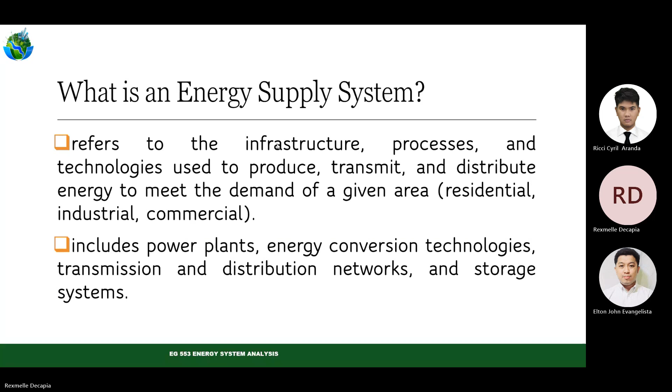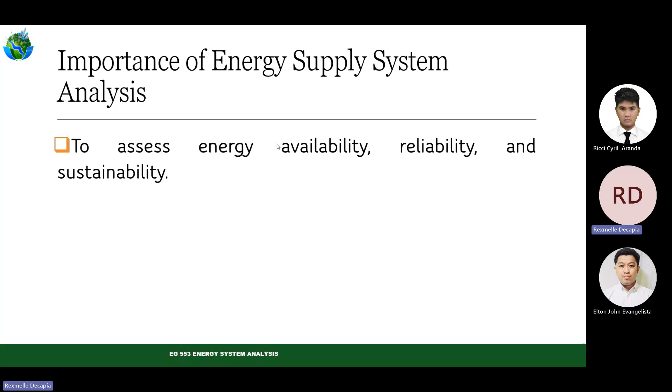So what is the importance of energy supply system analysis? First, we have to assess energy availability, reliability, and sustainability. Availability means adequacy of the supply. Reliability means its ability to be available at a given period of time. And sustainability means continuous supply of electricity or power, kasi alam naman natin it has a tremendous impact on our economy, or in our lives.

Kahit sa bahay nga natin, kapag nawawalan tayo ng kuryente or nawawalan tayo ng fuel sa pagluluto, talagang yun ay nagiging inconvenient sa atin. This problem, nung mga unang panahon, nung I think nung mga early 90s, yan, commonly yun yung nagiging problema natin itong tatlong ito, yung availability, reliability, and sustainability. And therefore, the government really tried to implement programs and strategies that would ensure na magiging available, magiging reliable and sustainable yung ating energy.

To identify the most cost-effective, environmentally friendly, and technologically feasible solutions. So when we talk about technologies, facilities, and resources, especially energy resources, tinitignan din natin yung cost effectiveness. We have to balance yung cost effectiveness, yung environmental impact, and yung technological feasibility, because iba-ibang forms or sources of energy ay syempre magkakaiba sila ng cost. Alam naman natin when we talk about conventional energy resources, itong mga non-renewable energy resources, normally sila yung cost effective, kasi medyo mura dahil sa availability nila.

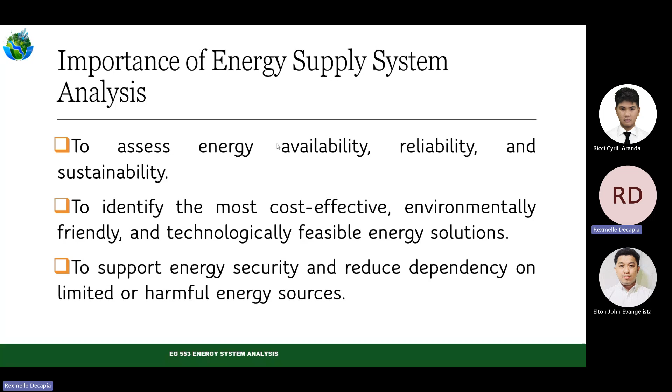Take note that the cost of energy in the Philippines is highly volatile, basically because our self-sufficiency is very low. Not even 50% of our primary energy is actually indigenous - more than half of this energy supply, especially the primary forms, is still imported from other countries, and that makes our cost of energy, specifically electricity, very volatile. So at least if we can further develop other technologies, if we can identify potential other sources of energy, there is a possibility that our self-sufficiency will also improve.

So what are the key components of energy supply systems? What are the components? First, let's look at energy sources. When we talk about energy sources, we're talking about non-renewable sources like fossil fuels - coal, oil, natural gas, nuclear energy. Those are just a few examples of non-renewable energy, but actually there are still a lot more examples.

And when we talk about renewable energy sources, there are also many - such as solar, wind, hydroelectric, geothermal, biomass. Sometimes we call it 'BIGSHOWE' - Biomass, Geothermal, Solar, Hydro, Ocean, and Waste energy.

Aside from non-renewable and renewable sources, we also adopt the combination of the use of these renewable and non-renewable energy sources - we call it hybrid systems. It combines renewable sources with conventional energy systems, like for example a geothermal plant combined with a diesel plant, or hydro and diesel. There are some power generating plants with that setup. We call it hybrid because hydro is renewable and diesel plant is non-renewable.

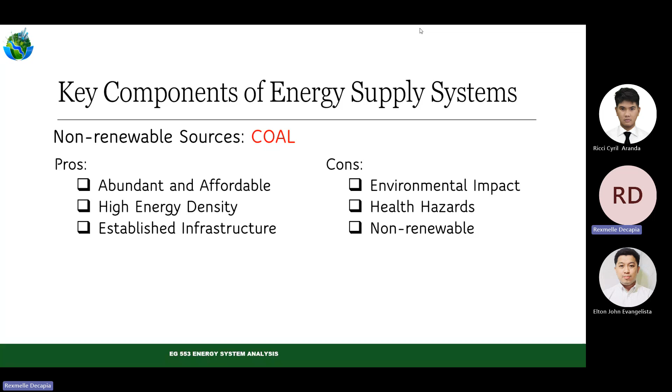And then another type of fuel na ginagamit natin, yung oil. Alam naman natin, lalong-lalo na sa mga sasakyan, yung mga ginagamit natin, mga bunker oils, diesel oils, gasoline oils, and so on, mga we call it mga petroleum products. So bakit natin sila ginagamit?

Katulad din ng coal, mataas yung kanyang energy output. Aside from that, yung oil is more versatile than yung coal. At what do you mean by more versatile? Mas marami siyang nagiging application.

For example, nagagamit siya sa transportation, kagaya ng mga gasoline and diesel engines. Nagagamit siya to produce heat, as fuel. At nagagamit din siya sa mga chemical industries, to make other usable products like plastics, fertilizers, and other synthetic materials.

So this is highly versatile in comparison with the coal. Kaya talagang pag sinabi mong oil, kaya tinatawag natin silang petroleum products kasi yung range ng products ay talagang madami. At similar to the coal naman, talagang well-established na yung mga infrastructure for extraction, for refining, for distribution and transportation. So talagang it has been there for several years, kaya talagang it's already established.

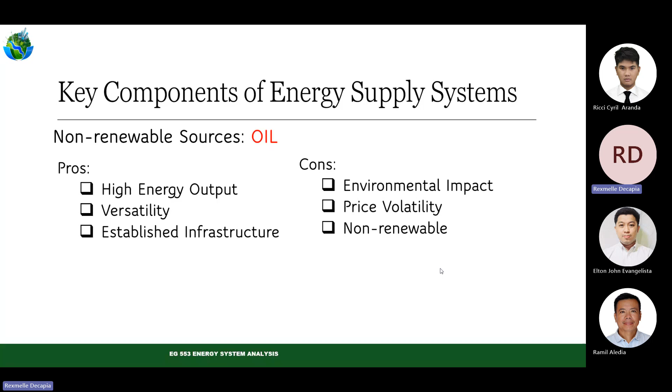non-renewable energy source ay yung tinatawag nating natural gas. Sa Pilipinas meron tayong mga natural gas, kung naririnig nyo sa may Malampaya. Pero sabi nga nila yung ating reserve for natural gas ay medyo konti na lang, I think mga by 2030 or by 2040 ay talagang depleted na yung indigenous supply natin ng natural gas. Kaya we are trying to locate another potential source of natural gas, because some studies says that there are still other potential areas in the Philippines with high natural gas reserves, but that is something that still has to be proven.

May mga studies na ginagawa yung mga resource assessment experts on quantifying the amount of natural gas reserves in a particular area. So sa mga isla malapit din o sa mga areas malapit din sa Palawan, sabi nila marami pang mga natural gas reserves that are not yet explored.

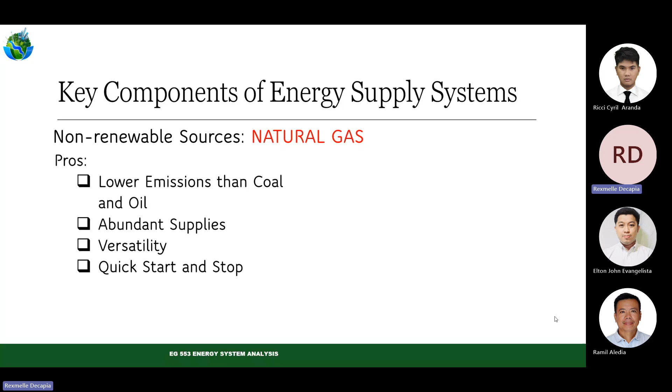Madali mo siyang i-on, madali mo siyang i-off. Parang yung stove sa bahay natin, di ba? Madali lang naman siyang i-on, saka madali siyang i-off. Because hindi katulad ng coal, pag pinatay mo, meron pang baga. Pero sa case ng natural gas, talagang pag pinatay mo, automatically mamamatay siya.

However, meron din naman siyang mga disadvantages. Siyempre, katulad din ng coal and oil, meron din siyang significant emissions, emissions of greenhouse gases, lalong-lalo na yung methane.

Yung methane kasi, it becomes yung nagiging greenhouse gas that cause yung global warming. Then, yung environmental impact ng extraction, siyempre gumagawa kasi tayo ng mga hydraulic fracturing. Pag sinabi nating hydraulic fracturing, yung ground or yung rock structure ng earth ay binubutasan natin, just to extract, to allow the gas to escape from this crack.

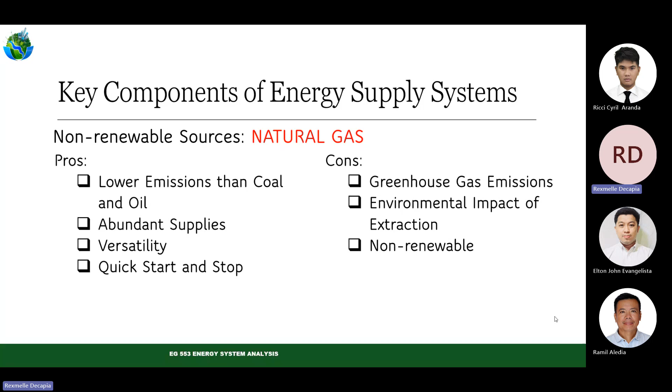So yun yung sinisira niya, sinisira niya yung natural na landscape. Yung pagsira natin diyan, yung mga hydraulic fracturing na yan, doon din kasi dumadaan yung groundwater natin, so there is a possibility na yung groundwater natin will be contaminated with natural gas. Sometimes nagiging cause din siya ng mga seismic activities katulad ng geothermal power plant, at talagang once na-damage na yung water body, sisirain niya rin talaga yung environment. And this is also a non-renewable form of energy.

Okay, another is a very controversial form of energy, especially sa Pilipinas. Napaka-highly controversial nito. Up until now, marami pa ring haka-haka, marami pa ring mga plano, marami mga proposals, na magtayo or patakbuhin or paganahin yung Bataan Nuclear Power Plant. Na up until now, wala pa rin namang nangyayari. Actually, we have an initial discussion with the PNRI.

We are planning to, hopefully, magmaterialize na magkaroon kami ng collaborations to conduct trainings, at magkaroon tayo, makapag-develop pa tayo ng maraming mga nuclear physicists, at mga radiologists, technical manpower pagdating sa nuclear energy. Kasi there are plans na mag-establish ng nuclear power plant sa Pilipinas.

So, yun yung plano, together with Japan Atomic Energy Agency and International Atomic Energy Agency. So, we are trying to collaborate, hopefully mag-materialize na makapag-train o makapag-develop ng mga experts sa Pilipinas pagdating sa nuclear energy, so that kapag talagang nag-decide na yung gobyerno na i-pursue yung establishment of nuclear power plant, at least meron na tayong mga ready na manpower, technically knowledgeable and capable, probably hindi para mag-design, probably just to operate and monitor and run the facility.

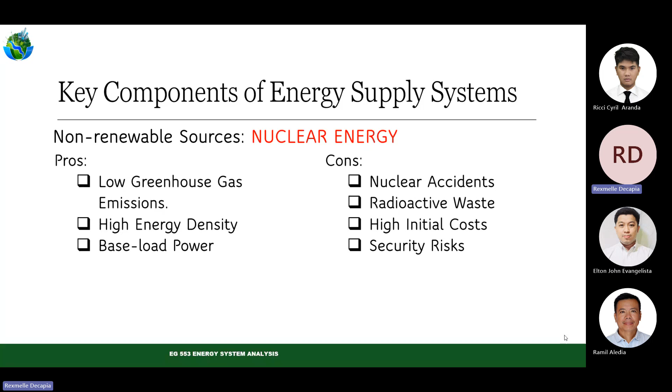Okay, so we're done with mga non-renewable energy sources. Pero medyo marami pa po yan. Diniscuss ko lang yung pinaka-common at pinaka-gamit na form of non-renewable energy. Same with that, we are going also to discuss yung mga pinaka-common, kasi marami pang renewable energy sources.

Mga thermionic, magnetohydrodynamic, but I will not dwell on that kasi yung mga bagong technology na ginagamit, mga piezoelectric, ganun, we will not dwell on that kasi hindi pa siya well established. We will just be discussing yung mga renewable energy that are already established.

Although sinasabi ko lang na established kasi gamit na, but in terms of efficiency, in terms of studies, there are still a lot of studies being conducted, particularly to improve the type of materials na ginagamit. Kasi when we talk about solar energy, dalawang paraan ng pag-utilize ng solar energy. Pwede tayong gumamit ng photovoltaic cell.

Yun yung common na nakikita natin, mga photovoltaics. Or pwede natin siyang gamitin solar thermal. Ito yung mga alam naman na siguro natin, yung mga parabolic dish na ginagamit, for yung iba gumagamit ng tawag natin nun, I forgot the right term. But there are a lot of technologies na ginagamit, just yung mga solar, pero normally mga solar concentrators ang ginagamit talaga kapag solar thermal.

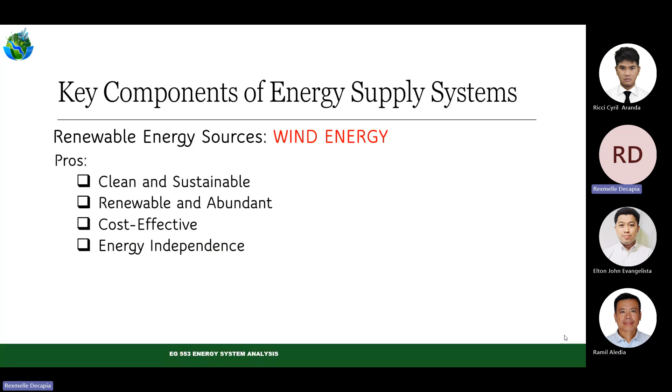Parang off-grid yung lugar, wala pang supply ng electricity doon sa site na napili niya. So yun naman yung advantage ng ganitong technology.

Disadvantages or consequences are intermittency and variability, alam naman natin yan kasi dependent tayo sa wind. Impact on wildlife, kasi pag malalaking wind turbine, sabi nila nakakaapekto sa mga ibon, na nag-create din sila ng flickering effect na nakakaapekto din sa mga ibon, at yung tumatama sila doon sa mga blade.

Syempre, yung lugar, kung napapansin nyo, sa may Burgos, dati yun ay kagubatan, yun ay forest, but when yung wind farm was established doon, medyo nakalbo yung bundok. So, impact on wildlife, noise and aesthetic issues, space and location requirements.

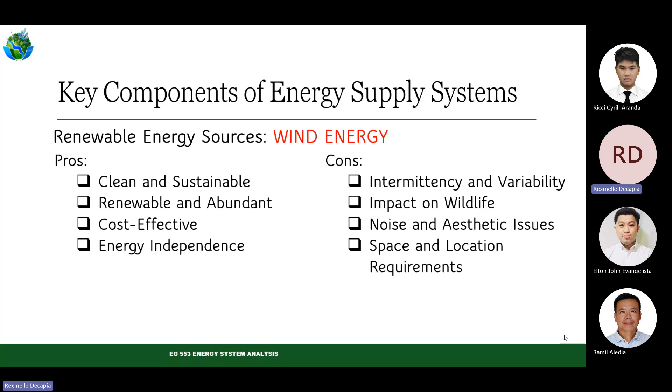Hydropower plant. Siyempre alam naman natin yan, ito yung mga hydro turbines, mga water turbines na tinatawag natin. So, these are highly reliable and consistent.

Once na meron kang stored. Ang kagandahan kasi nito, hindi katulad ng air o hindi katulad ng wind and solar energy, ito ay naiimbak o naiipon sa mga reservoir.

Kaya pwede kapag tag-ulan, pwede ka mag-ipon ng tubig sa mga reservoir. Kapag tag-araw or tag-init, pwede mong gamitin yon to produce electricity. Kapag araw, halimbawa malakas yung energy demand, yung mga planta ay nagiging power generating plant. Kapag gabi, na medyo mababa yung demand for electricity, yung planta ay nagiging pump na pang-ipon ng tubig. Yan yung mga tinatawag nating pump storage hydro power plant, na kapag mababa yung demand, instead na gamitin sila to produce electricity, ginagamit sila to store water doon sa reservoir.

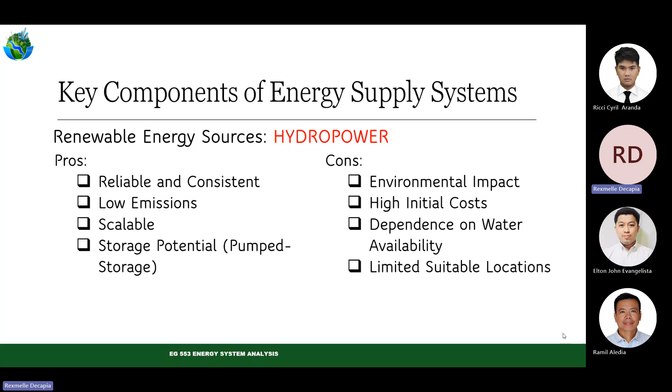Next, geothermal energy. So geothermal, when you talk about geothermal, is energy extracted beneath the earth. May tatlong klase tayo ng mga geothermal energy: may mga liquid dominated, steam dominated, at meron tayong mga hot dry rocks. In terms of technology, meron tayong mga binary geothermal, meron tayong multi flash, single flash power generating geothermal power plant or multiple flash geothermal power generating plant. So technically, yun yung iba't ibang classifications ng geothermal energy.

But basically, pag sinabi natin geothermal energy, ni-extract natin yung init coming from the earth, to run normally yung mga turbines. So yung init na yon, pwede siyang direktang gamitin sa turbine, yun yung tinatawag nating steam-dominated geothermal plant or geothermal reservoir. O pwedeng yung tubig naman, yung hot water, gagamitin natin as a source of heat para doon sa fluid na nagpapatakbo naman ng turbine.

The disadvantage is that it is location specific. Although the whole ground of the Earth beneath has geothermal energy, what matters is how deep it is. When you have a geothermal energy reservoir, you have to make sure it is not too deep so that you can also minimize the cost of drilling.

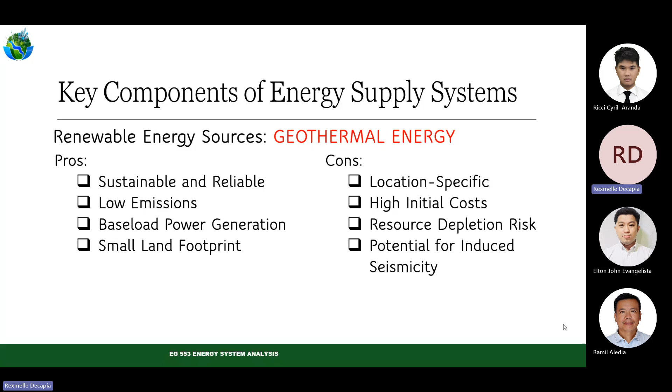And there's potential for induced seismicity. When drilling, the vibrations can be hazardous or risky. And then the next one is ocean energy.

Actually, ocean energy is one of my areas of expertise. I am very interested in ocean energy, particularly ocean wave energy generation. We have developed a small ocean wave energy conversion device in Taguig. We put up a small wave tank and developed a small wave energy conversion device there, because that is my research interest. I am doing several research studies about ocean energy, from resource generation to development of technology. Actually, most of my research in TUP Taguig is related to ocean energy.

When we talk about ocean energy, there are three forms: tidal energy conversion, wave energy conversion, and OTEC or ocean thermal energy conversion.

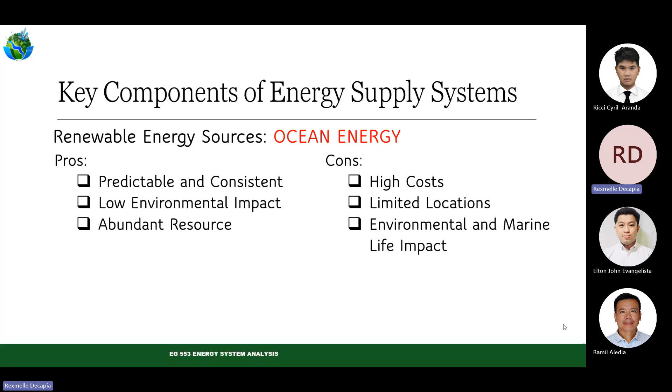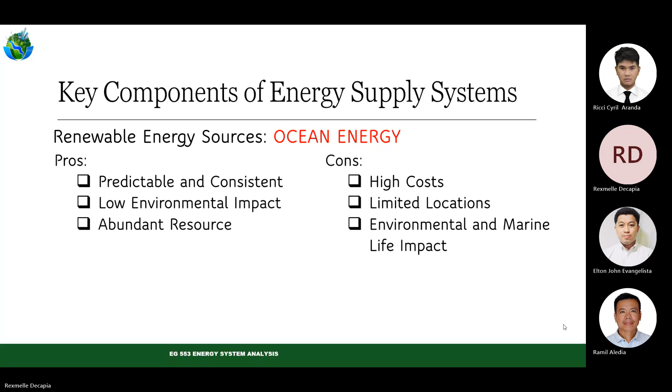Okay, so environmental and marine life impact. If we put up wave energy facilities in the ocean, it will definitely affect marine life, even the economic purpose of the given site might change. For example, in the Philippines, when we talk about wave energy, we think of islands or places known for surfing. I've actually studied several surfing sites in the Philippines, and there is a very big potential for ocean wave energy. But the challenge is that these areas are normally intended for surfing, which attracts a lot of foreigners and is a source of income for the people. Yet I am going to introduce a technology that might displace these surfing sites.

Okay, the next one is biomass energy. In graduate studies, many propose about biomass energy. Even in the undergraduate program, I am currently handling thesis, and we have several student proposals about biomass energy, because there are so many potential technologies that can be used for biomass. There are many forms of biomass, like large facilities that use biodigesters, aerobic and anaerobic biodigesters.

So, biomass energy is carbon neutral. Why is it carbon neutral? Because the carbon dioxide released when burned is roughly equal to the carbon dioxide absorbed during the plant's growth, through photosynthesis. The carbon dioxide is used by plants to produce sugar, meaning that carbon dioxide was absorbed by the plant. And when you burn the plant, it releases carbon dioxide again. So the absorbed and emitted carbon dioxide are neutralized, that's why it's called carbon neutral or has neutral potential.

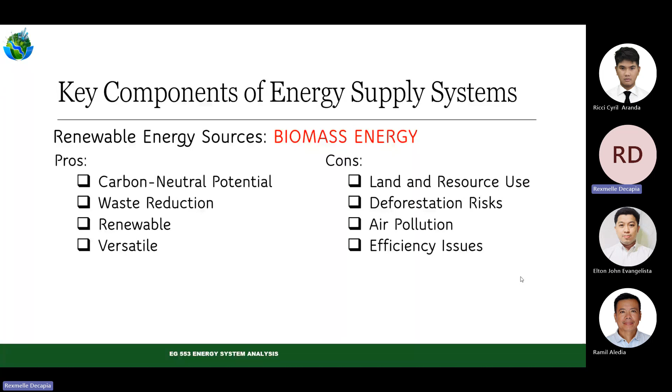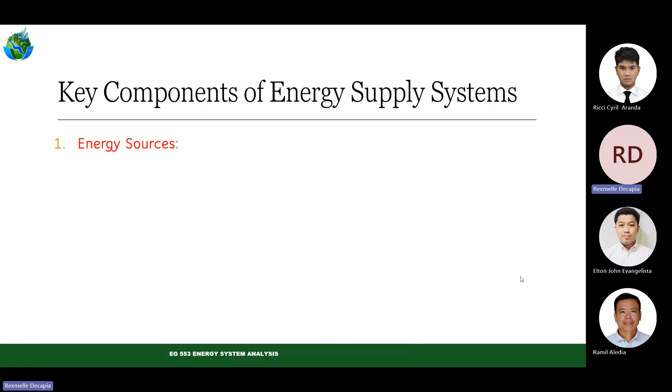Okay, so those are non-renewable and renewable energy sources. What's common nowadays are what we call hybrid systems. When you say hybrid systems, this combines renewable sources with conventional ones. As I said earlier, for example, geothermal plant and diesel power generating plant, hydroelectric power plant and diesel power generating plants, and so on.

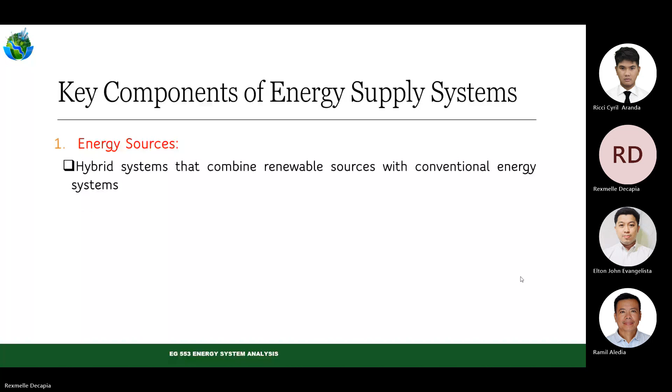So what are the advantages of hybrid systems? In terms of increased reliability and stability, it complements the sources. If you integrate renewable energy such as solar or wind with conventional sources like diesel and natural gas, you can ensure a continuous and stable energy supply.

Kapag mababa o kapag gabi, expected mo walang solar energy, o kapag mahina yung hangin in terms of wind, pwede kang gumamit ng mga diesel o natural gas para nagko-compensate sila sa isa't isa. So yung tinatawag nating complementary sources. Kapag mataas naman yung generation mo ng solar, wind, o hydro, mababa naman yung generation mo doon sa mga non-renewable energy power facilities.

Okay, the next one is it reduces risk of interruption. Siyempre kasi they complement each other, talagang sustainable yung supply ng energy kasi nagba-back up sila sa isa't isa. So yung risk of power interruption ay na-minimize.

Okay, the next is improve efficiency. Alam naman natin ang efficiency ng mga renewable energy facilities ay mababa. Solar, wind, lahat yan mababa yung kanilang efficiency. Unlike sa mga non-renewable plant, mga conventional power generating plants natin, ito naman ay medyo mataas. Excuse lang.

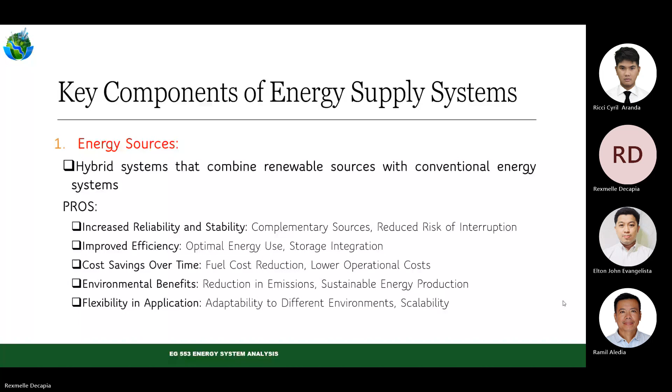Next is in terms of consequences o disadvantages. So, yung consequences o disadvantage is high initial cost. Mas mahal kasi yung renewable energy, may complex maintenance kasi mas maraming components ang gagamitin, you will be using both systems ng renewable and non-renewable. So, dahil mas maraming components, mas mataas yung kanilang maintenance.

Nagkakaroon din ng certain intermittency ng supply kasi kapag nagiging intermittent yung mga renewable energy resources. Okay, at sometimes challenging din yung pag-merge nung dalawang magkaibang facility. So yun yung integration ng mga facilities ay challenging.

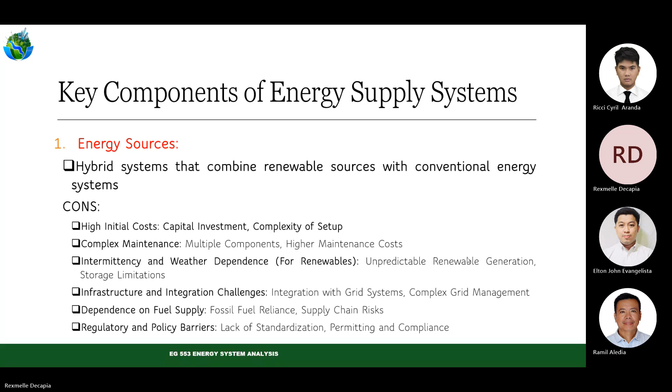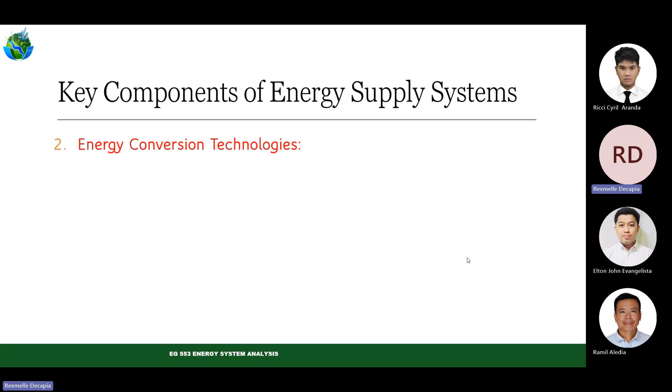Next, from the sources, let's look at the conversion technologies. When we say conversion technologies, earlier we discussed fuel or energy sources, now these are the technologies, such as internal combustion engines, external combustion engines, photovoltaic panels, wind turbines, and so on. It also includes grid technologies for electricity transmission and distribution, and energy storage like batteries, pump hydro storage, or compressed air storage.

There are several considerations we look at whenever choosing a certain conversion technology. First is emissions and pollutants, like greenhouse gases. If we use fossil fuel, the technology we use must be compatible with fossil fuels, and these technologies also release greenhouse gases. So that's one of the considerations we have to look into, the environmental aspect.

It has a corresponding cost. When you do an energy plan, you should include the corresponding cost called the carbon footprint, because the carbon footprint represents the emissions emitted by these power generating systems. That should be part of the plan. Then, resource sustainability.

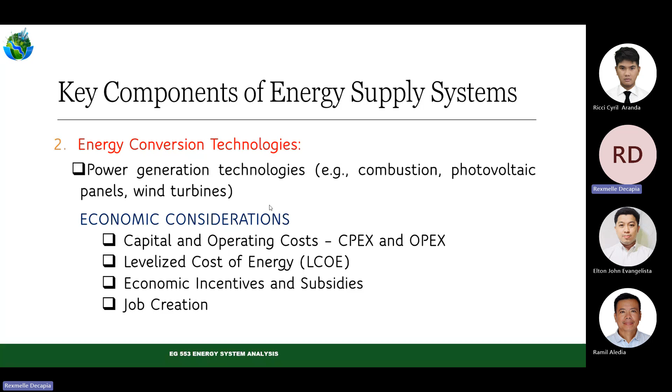Because most of these are under the build, operate, and transfer agreement, we call it the BOT agreement, in which after several years, the facility will be turned over to the Philippine government. So most of the designers or builders of these plants are foreign people, while we are the operators, sometimes admin staff at the plant. So either way, it provides jobs for the people.

And then the next one is the availability of resources. We also look into that. So if you're going to use solar energy, wind power, hydro, there's something called resource assessment. Before you can put up a plant, you really have to conduct a resource assessment. Different types of energy sources have different approaches on how to estimate or assess the potential amount of energy.